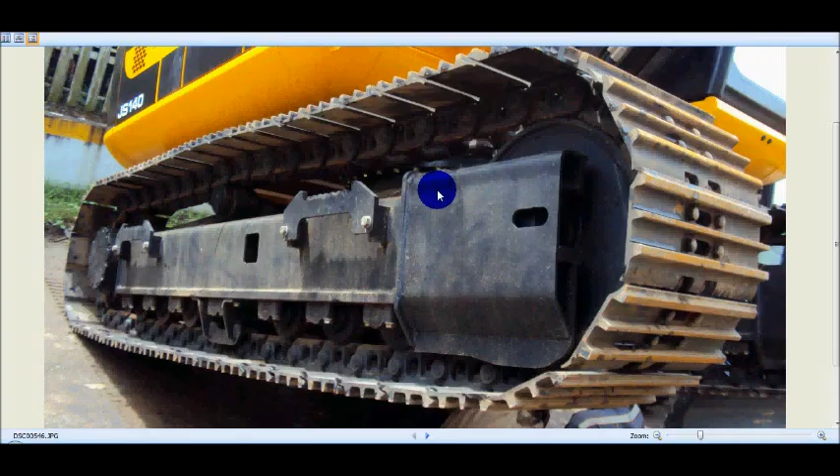In this topic, we'll be learning about the wear and tear and failures that can happen, or how to measure those wear and tear defects that can happen to the track of an excavator machine. So here you can see the track over here. This is the track of an excavator machine. This is similar to the track of a tank, which is used in military operations. So let's see how these wear and tear measurements are taken.

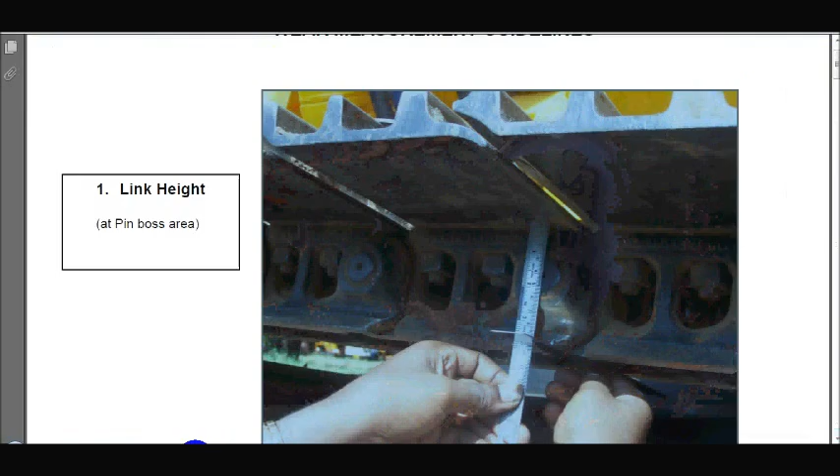For taking the measurements, the link height at pin boss area needs to be taken. So this is a link over here. This unit, as you can see over here, this whole unit over here is a link. So we take the link height at pin boss area. So this is the boss of the pin, or here this is the boss of the pin. So here in the center we have the pin.

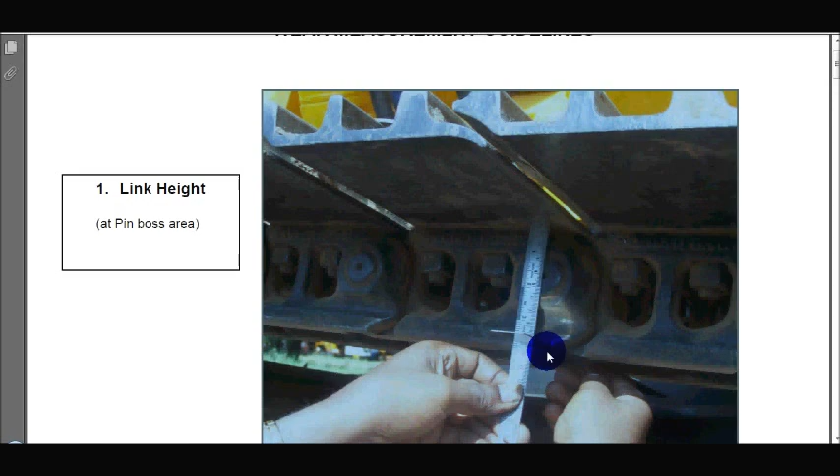So taking the link height, so this is the link, from here to here is the link. So we measure the link height like this by keeping a ruler on the bottom, by keeping the ruler at the pin boss area. So this is the pin boss area. We take the link height.

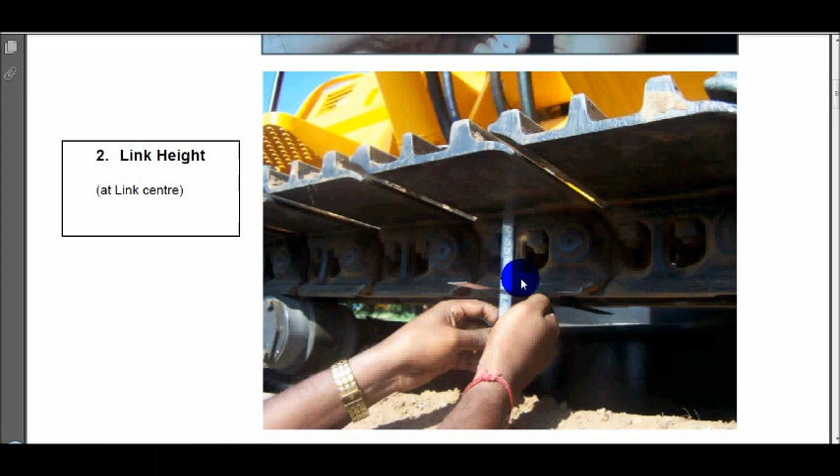Okay, then we take the link height at the link center. So from here to here is the link, because here it is connected to the other link. So we take the center of the link as this point, and we take the height of the link at the link center also. Okay, that's the second measurement.

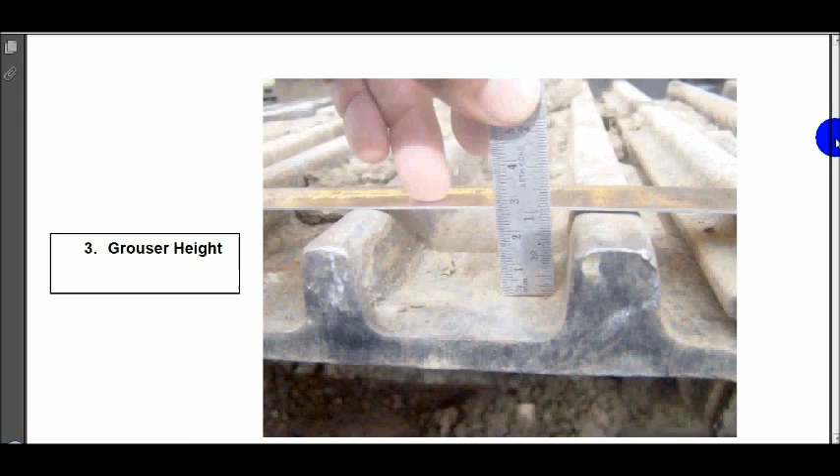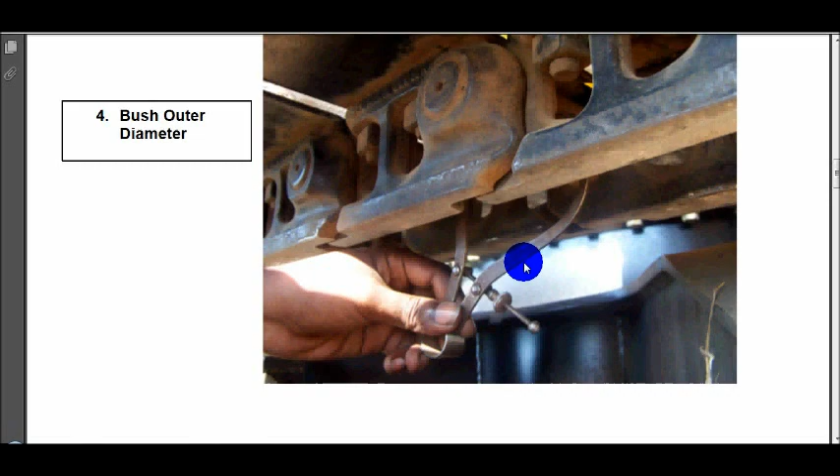Then we take the bush outer diameter. So we have the bush over here inside, which is connecting both the pins. So we take the outer diameter using the unit which is used for measuring the internal and the external diameter. So this unit is used for measuring the external diameter. So we get the bush outer diameter over there.

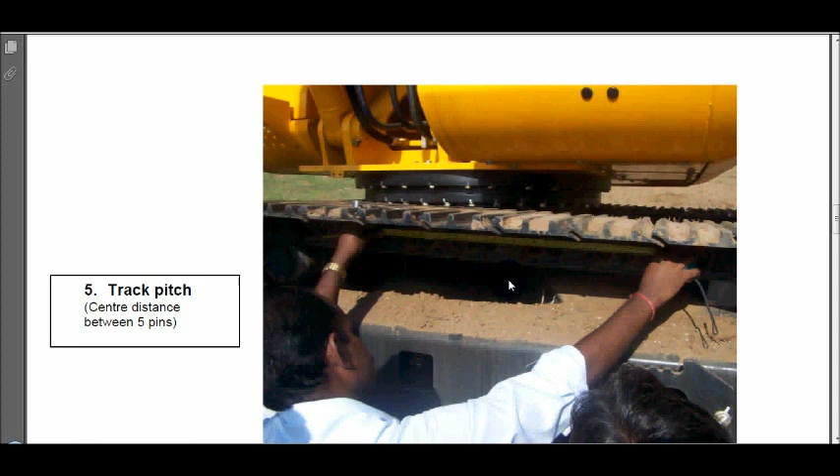Then track pitch. The way of measuring the track pitch is to get the center distance between 5 pins. So the 5 pin center distance is taken to calculate the track pitch. Then we take the roller tread diameter. So this is the roller over here on which the link is placed and it is guided. So we take the tread diameter of the roller to get its wear and tear.

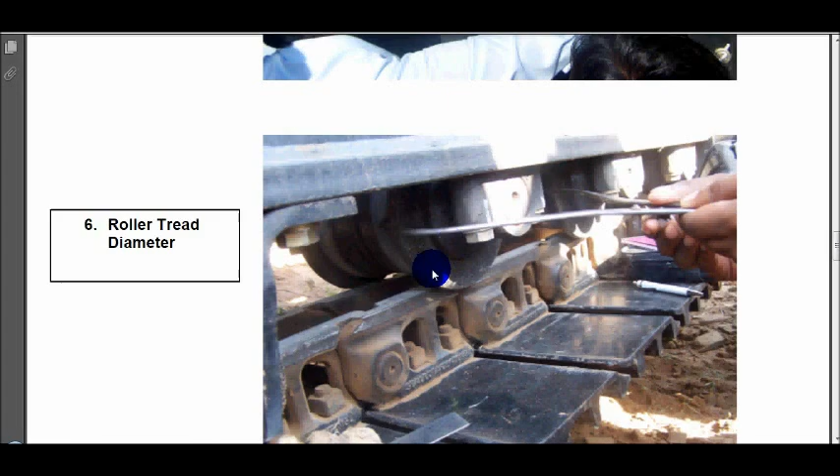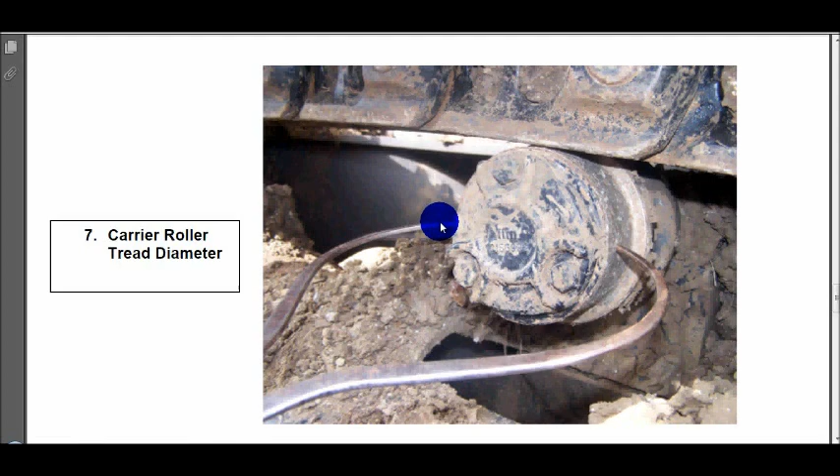Then the carrier roller tread diameter. So this is the carrier roller over here. So we take the external diameter of the carrier roller tread also. So that also gives us an idea about how much wear and tear has happened to that component.

Here we have the idler wheel. So we take the idler hat depth like this. We're keeping a ruler straight across the center part of the idler and getting its depth. So we will get the wear and tear that happened to the idler. Okay, that's the hat depth.

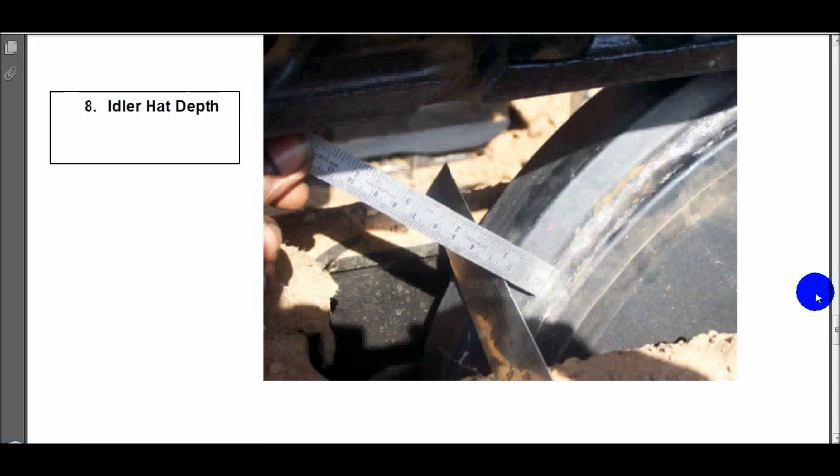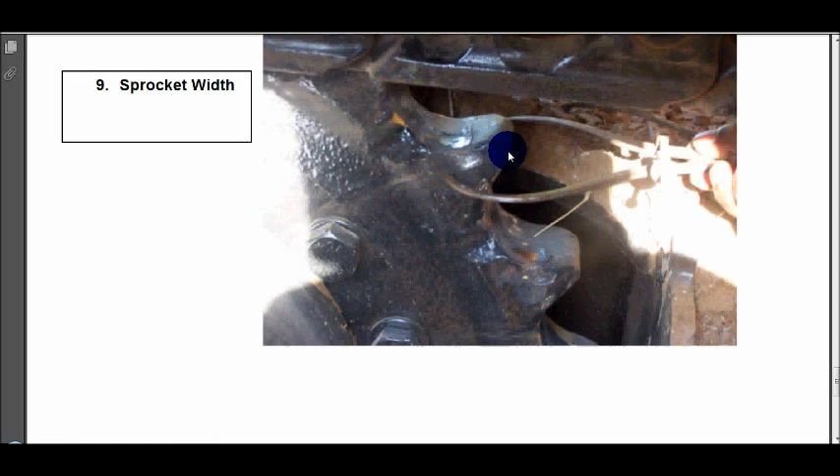Then the sprocket. So this is a sprocket which is engaging like a gear with the link. So the sprocket wear and tear is also measured. You can see material or the metal getting worn out from here. So that sprocket width also needs to be measured. So with this external diameter equipment we get the sprocket width. Okay, so that's how different measurements of a tracked excavator machine to understand its timely wear and tear are done.